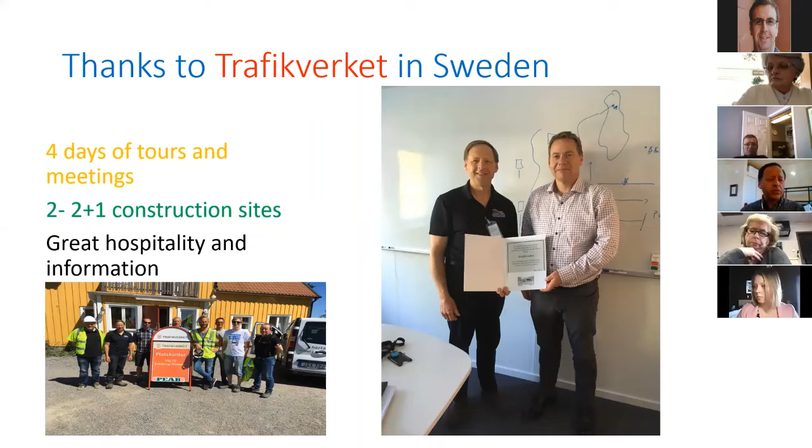Here are just some pictures of some people I met, and the gentleman on the right is a world-renowned road safety expert, and was a big part of the development of what we call Vision Zero, and I'll talk a little bit about that very briefly in a moment. And on the left is a crew at one of the construction sites I visited, and I'll show you one picture from that later on.

meaning that we have to recognize that humans make mistakes. And when a human fails, the road system should not. That's really what the essence of safe systems is all about. And that no one should die on our roads. There are solutions to this. We need to put more responsibility on road designers and less on road users. It is a shared responsibility.

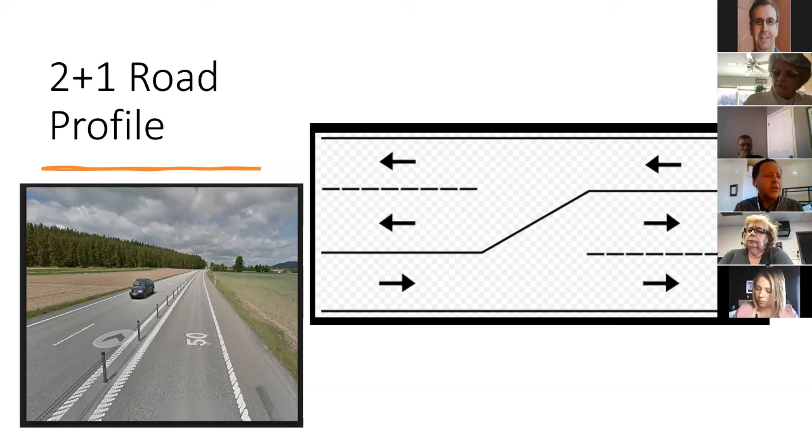So the 2+1 profile alternates on a continuous basis every 1 to 3, 2 to 5 kilometers. It really varies again on the terrain, which allows overtaking of slower vehicles. And the goal generally on the Swedish system is to allow for passing opportunities about 40% of your trip. So in some cases, as I mentioned earlier, where it's 1+1, it is affected by the terrain of the area.

So volume capacities, they're built on roads that are between 2,000 and around 18,000 or 20,000 average annual daily traffic. So for Northern Ontario, that's all of 17 and 11. There are some areas that are on the high end of that. And so the 2+1 may not be suitable for that, but it's certainly suitable for the vast majority of highways 11 and 17 in Northern Ontario in those volumes. So here's a shot from my winter trip, and it shows you, in this case, the single lane side.

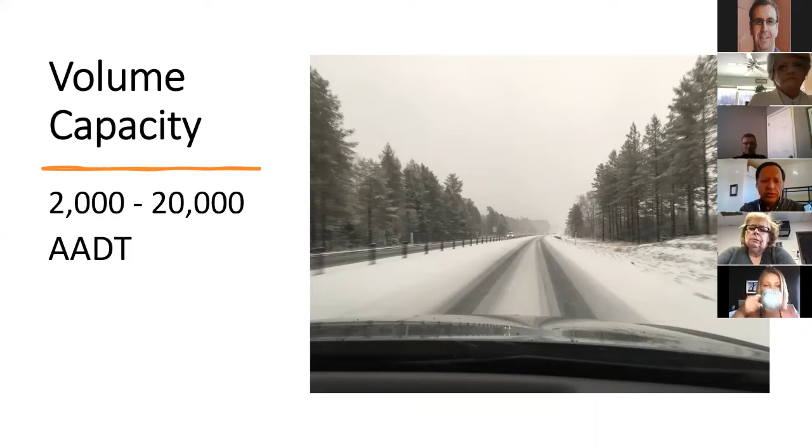Speeds and performance has also been studied in various reports, and I've included those in my report. If anybody wants my report, I can certainly send it to you. But generally, there's been a slight increase over the 13-meter roads, the original roads, but most of those increases are in the 2-lane section. So it's something we experience here too, where there's a passing lane. The speeds tend to increase because people are passing other vehicles.

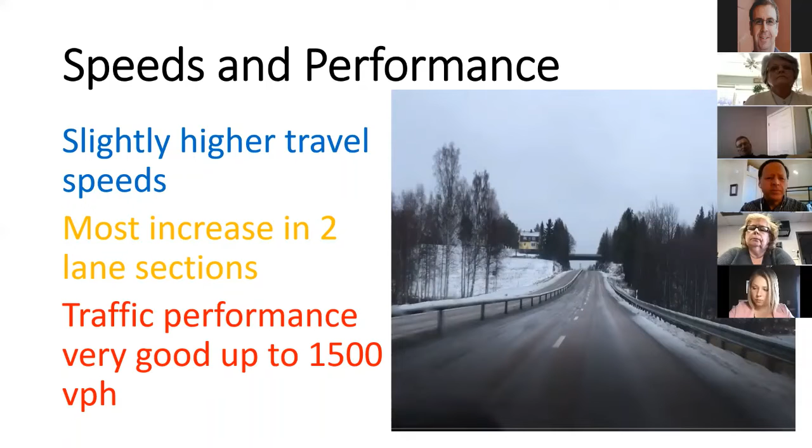And the posted speeds on the Swedish 2+1 roads are, in most cases, 100 kilometers an hour. And they are effective for vehicle volume up to 1,500 vehicles per hour. So we're well within those ranges in Northern Ontario. So just wanted to talk a little bit about barrier types, and there are numerous types of barriers that are being used in Sweden.

And this picture is one I took in southern Sweden of a wire rope barrier, cable barrier, in the 1.5 meter reserve. And this one is a version that crosses from side to side on the posts, and also notice the rumble strips. So those white lines on either side of the median reserve are rumble strips, and they are put on most of the 2+1 roads just to warn drivers if they're getting too close to the edge.

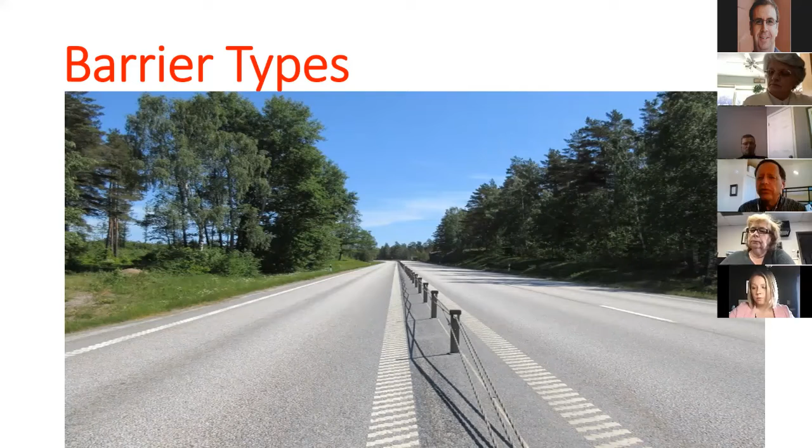These wire rope barriers are designed using various standards. So in Europe, they use a standard called EN 1317, which is designed to ensure that the barriers are designed for the vehicles that they're trying to contain. And normally, the maximum is a 10,000 kilogram sort of single unit truck. They're not designed for full transport trucks. However, there have been experiences where the trucks, because they hit it at a very low angle, are deflected, and actually there can be some positive effectiveness with larger trucks.

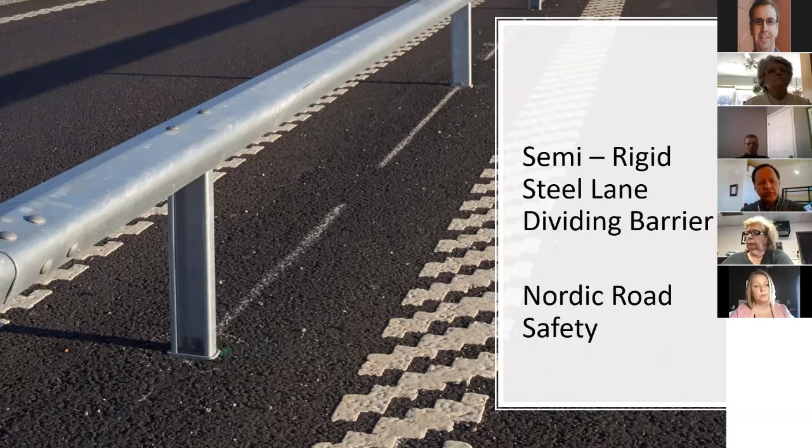So here's another, sorry, not cable, a semi-rigid steel barrier. So this is the new model that is starting to appear, and in fact, Sweden has gone to these exclusively as they're building new 2+1 roads. So they're a semi-rigid steel barrier, and as you can see here, the post sits in the middle in a sleeve. So these have been very effective, and they are a little bit better from a maintenance perspective, particularly in northern Sweden, where the snowplows are operating. A slight touch on these is much less severe than on the cable barriers that would require some repairs. So they're finding that these are easier to install and they are less maintenance.

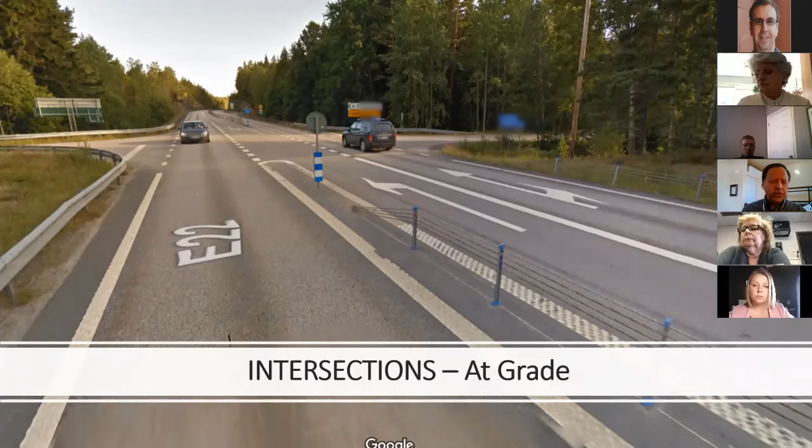So one of the other aspects of 2+1 roads is that the cost to build them is much lower because you're building it on an existing platform. So here's one example where we have an intersection, and intersections on any roads are always areas where we have more crashes. But the advantage here, of course, is that in those volumes that I talked about earlier, this type of an intersection is actually very cost effective and still relatively safe. So this is really not much different than an intersection we would have on a normal road. And all we're doing is ending the barrier for a short period of time through the intersection and then starting it up again on the other side. So vastly reducing the need for grade separated overpasses, those types of things that are hugely expensive.

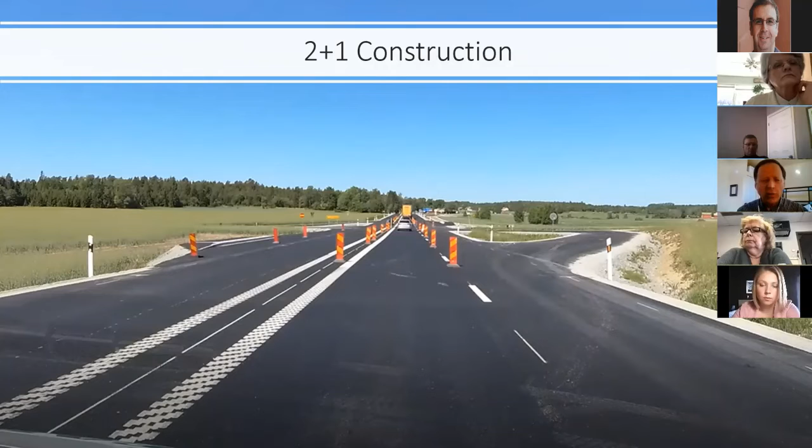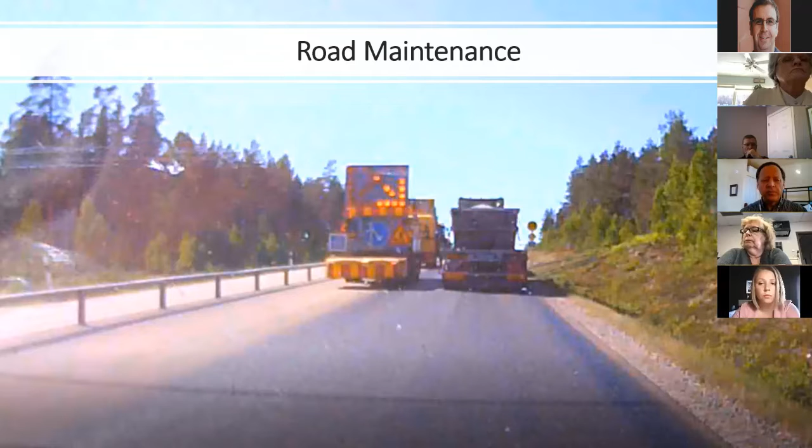How do you do road maintenance on 2+1 roads? Well, in Sweden, they use a lot of TMAs, truck-mounted attenuators, as you see here. They do most of the repairs from the 2-lane side, if necessary. However, the road can be closed and traffic rerouted from time to time as well, if necessary to close the single-lane side.

Trucking: I met with trucking industry officials when I was in Sweden as well, and they support the 2+1 roads. Their drivers are safer. They have fewer other vehicles, automobiles, etc., that pass inappropriately. They don't cut off trucks.

You can't pass inappropriately. And that is one of the huge advantages of this, not only for trucking, but for everybody. It becomes a self-explaining road, and you're staying there in that lane until you get your opportunity, which won't be too far up the road. But this is one of the things that the trucking industry has found that they like about it.

Of course, Sweden being a very northern country, it was very dark when I was there in December. I was there December 10th to the 15th, I guess it was. So here's some of the maintenance in the winter. This is a wide wing plow that's used in Sweden. And they also will tandem plow, so they'll use 2 trucks, for example.

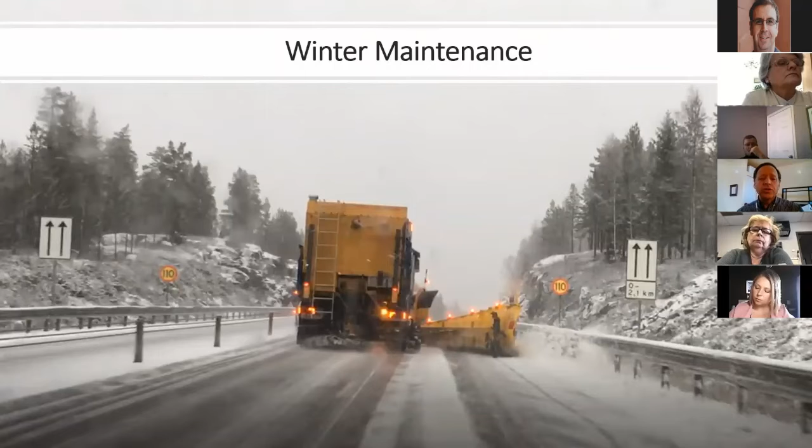But here you can see that we have the barrier in the middle. We have very effective roadside safety hardware as well, where we have the steel barriers protecting the rock cuts. You see a lot of that in Sweden as well. And you'll notice the signs on both sides of the road telling the driver that we're just starting a two-lane passing lane.

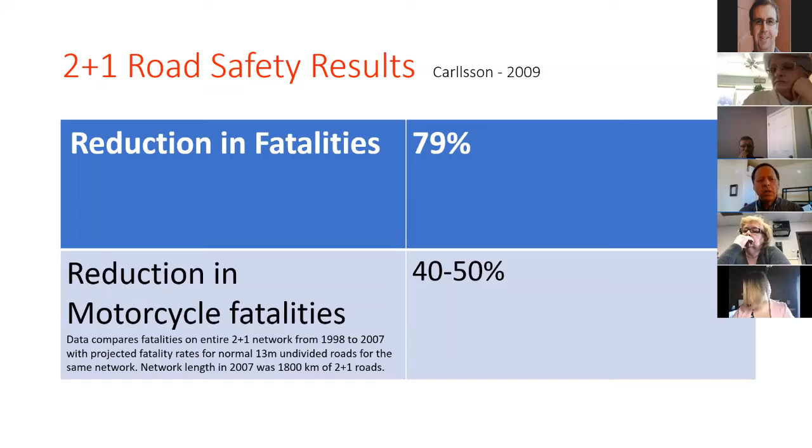So just to kind of wrap up on the presentation here, I want to look at some of the results. Here are some results from a pretty extensive report that was done back in 2009, and there have been some other reports as well. When they compared the existing 13-meter roads that they had and studied the difference after about 10 years, they saw that the reduction in fatalities on these rural highways was in the 70 to 80 range, and motorcycle fatalities were down significantly as well. So when we eliminate the possibility of head-on crashes, we really reduce fatalities.

This is also an interesting slide, from a 2015 study done by one of the researchers that I visited when I was in Sweden, and it looked at the relative risk of dying on various road types. The study had more road types in it, and I've pulled out the three main road types that we're interested in. If you looked at a divided highway, a motorway, a twinned highway, whatever you want to call it, your relative risk of dying is 1.

If you're on a two-lane 90-kilometer road, which is like most of our Northern Ontario highways, your relative risk of dying is over 5. And you'll notice the 2+1 in their studies from Sweden was very similar to divided highways, and in this case, slightly less. These numbers also are identified in Australian numbers, Irish numbers, and other countries as well, where the safety benefit of these 2+1 is exceptional. And when you consider the cost, you can build a 2+1, depending on how you do it, at maybe a quarter to a third the cost of a twinned highway.

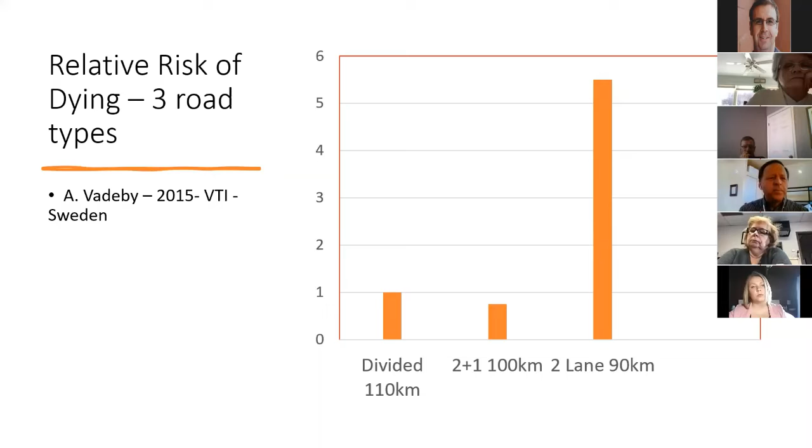And that's not even accounting for the vast reduction in environmental impact as well. So just to summarize some of the key points of 2+1 roads there, as I just mentioned, safety results equivalent to divided highways. They're low cost, built on existing platforms. We don't need to push another road through the bush, so less environmental impact. The design is flexible to the terrain.

So I showed you the picture of the 1+1, and that really helps reduce the cost as well, but maintains the safety aspect. And then there's expansion opportunities. So if volumes increase, much like the Irish did, then that same road platform can be expanded to 2+2. We continue to have the median barrier. So in a sense, we have a divided highway. And that can be used in places where there's higher volumes.

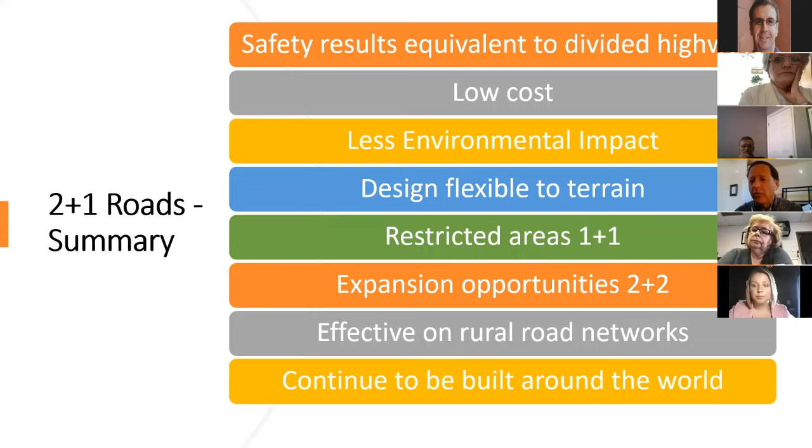And through our region here, through the Temiskaming region, we're starting to see some significant volumes between Temiskaming Shores and Englehart, Kirkland Lake, that kind of thing. There's a lot of traffic on those areas, and I think there's certainly other parts of Northern Ontario highways that are seeing a lot of traffic too, along 17, for example. So they're very effective on rural road networks, and they continue to be built around the world. So they have a lot of positives.

So this section, it's about a 6-kilometer section where they have volumes up over 20,000 vehicles a day, and they're just having fatalities every year. So they said, well, look, we're not ready to build the twinned highway yet, so we're going to build this. And it's been tremendously successful. They've had no fatalities on it. It's been in place for over a year and a half now. They've had some hits on it, and they've been able to manage that. So this really shows the effectiveness of this type of model.